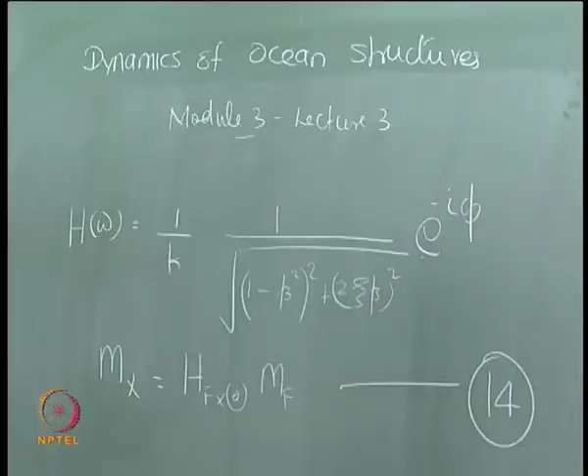In the last lecture we derived the transfer function equation, which has a response ratio beta, the ratio of omega by omega n, and zeta, the ratio of critical damping in percentage.

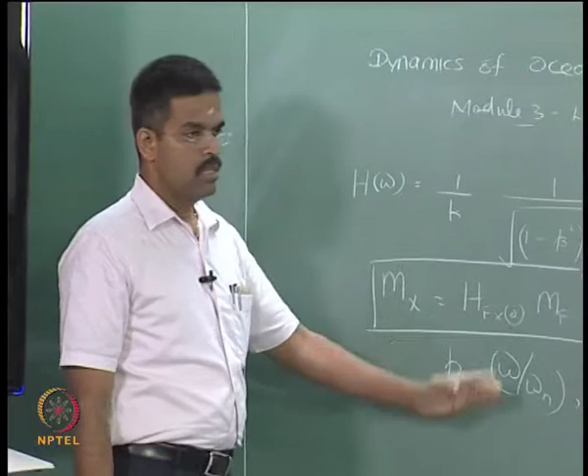Based on this, we derived a simple relationship between the variance of the response and the variance of the force, but here we are showing the corresponding connectivity between the mean value of the response and the mean value of the force.

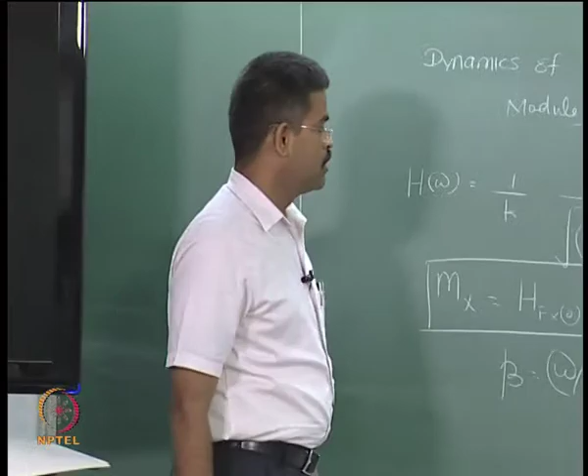We already know in a stochastic process we are talking about realization of the force and the x value. So F1, F2, F3 etc., or realization of f of x, are the set of ensembles of f of x, whereas x1, x2, xn are realizations of the response. Connecting these two is my transfer function.

We also see from equation 14 that if the force function is a zero mean process, then the response will also remain a zero mean process.

So let us quickly get the details of the response spectrum and see how it looks like.

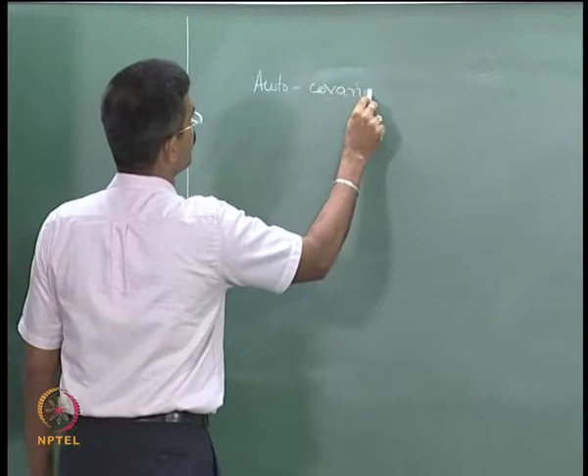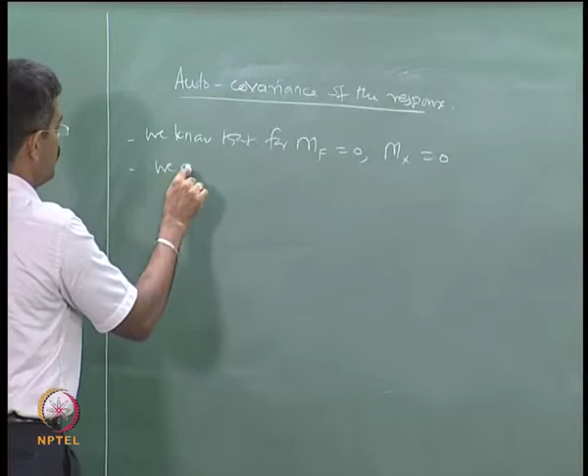Now let us look at the autocovariance of the response. We already know that for m of f equal to 0, mx also remains 0, and we agree that f of t, especially in offshore structures, is a stationary process.

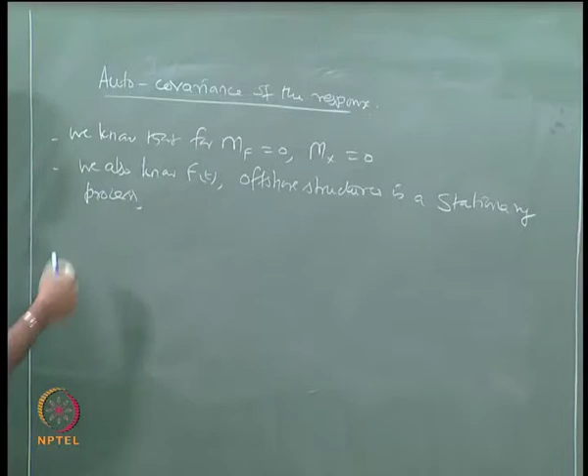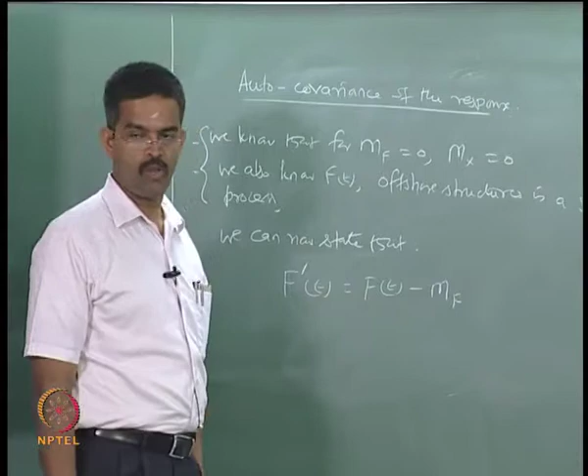Based on this we can now write a new function, f dash of t, which can simply be said as f of t minus m of f. I can always deduct the mean value. Fortunately in my problem, since it remains stationary, this may tend to 0 for a zero mean process. So it is as same as this.

In that situation, if x dash of t be the response of the load process f dash of t, then I can write x dash of t as the integral from minus infinity to plus infinity of h of x of s, f dash of t minus s, ds. This is the standard form for writing the expression for the response.

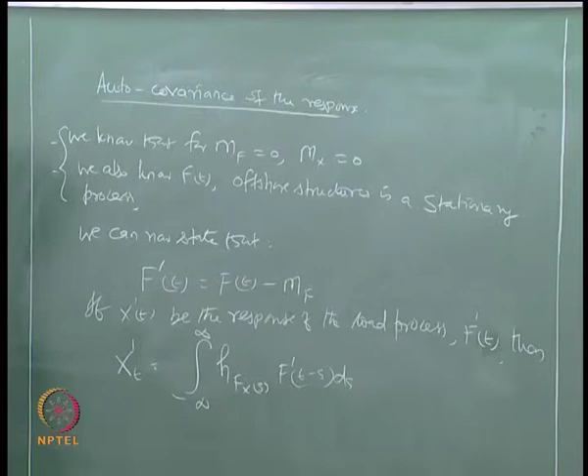Now substituting f dash of t as f of t minus m of f, I can write this equation as 0 to infinity, because the realization at the negative value becomes invalid for us, of h of s, f of t minus s, ds, minus 0 to infinity h of fxs of mf ds.

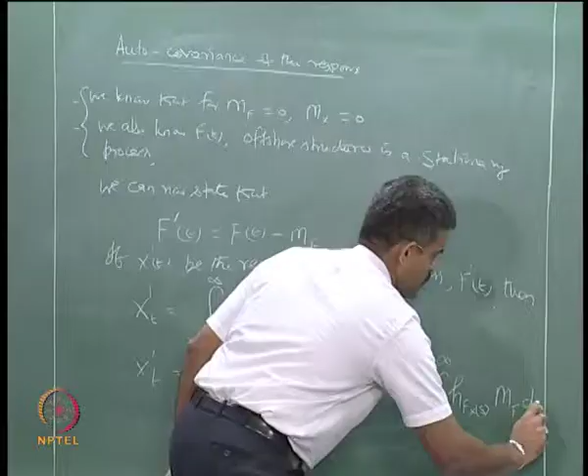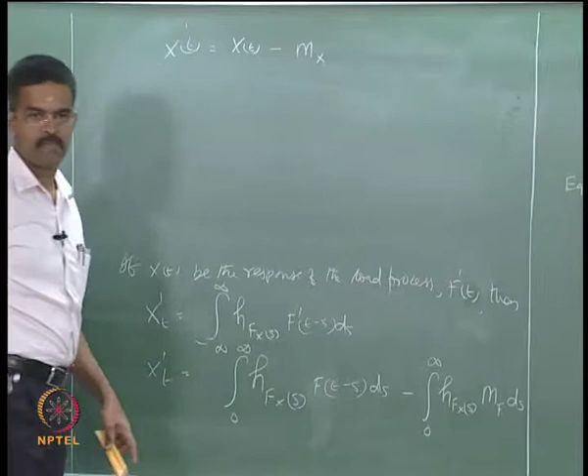This is nothing but x dash of t, is x of t minus, this can be said as the mean value of x, which I call equation number 15.

Now, for x dash of t to be a zero mean process, f of t and f dash of t will have the same autocovariance.

Using this statement, the autocovariance can be given as xj of t, xj of t plus tau, expressed as 0 to infinity h of s1 of fj t minus s1 ds1, which is one part corresponding to xj, multiplied by 0 to infinity h of x s2, fj of t plus tau minus s2, because I am looking for a time shift, ds2.

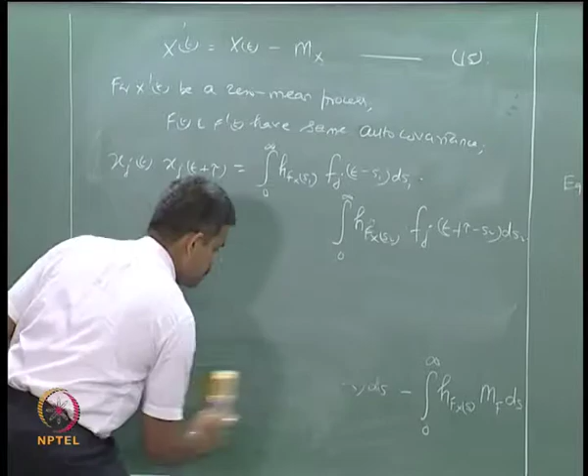I can rewrite this equation slightly by rearranging the terms. Now this becomes the integral of h of x s1, h of x s2, fj of t minus s1, fj of t plus tau minus s2, of ds1 ds2, which I call equation number 16.

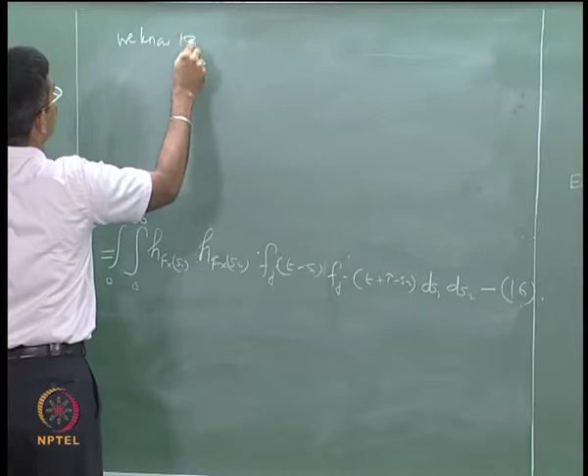So fx s1 s2 fj. Now, we already know the expected value of x at t plus tau can be expressed simply as the limit as n tends to infinity of 1 by n, summation j to n, xj, n, x t plus tau. This is a standard expression for finding the expected value at a difference of tau.

I am using the same methodology for expressing equation 16 now. I should say the double integral from 0 to infinity of h f x s1, h f x s2, times the limit n tends to infinity of 1 by n, summation j to n, of fj t minus s1, fj t plus tau minus s2, ds1 ds2.

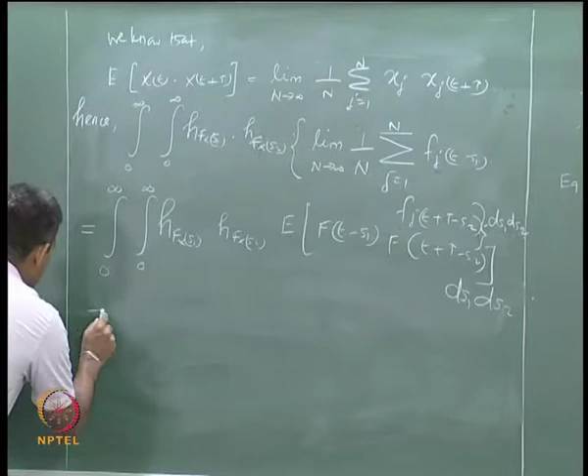Now I slightly re-alter this equation, saying 0 to infinity h of x s1, h of x s2, replacing this by the covariance of the force with tau plus s1 minus s2, ds1 ds2. I can write this because f of t is stationary, and since f of t is a stationary process, the expected value of x of t plus tau will be independent of time.

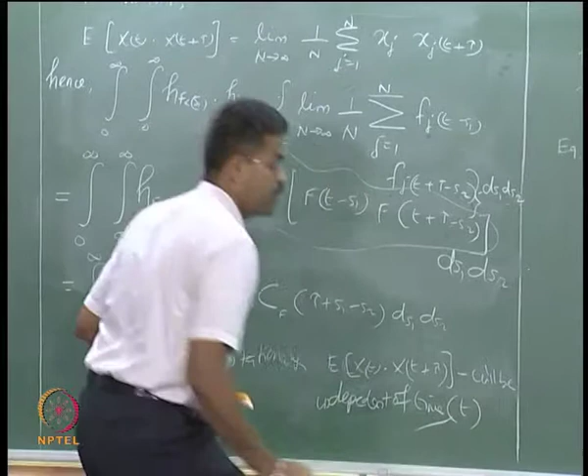To be very specific, independent of t, not tau—tau will be there. Therefore, now I can write the autocorrelation function. Any questions here? So I will rub this part, take away this. Now I can write the autocorrelation function for this condition.

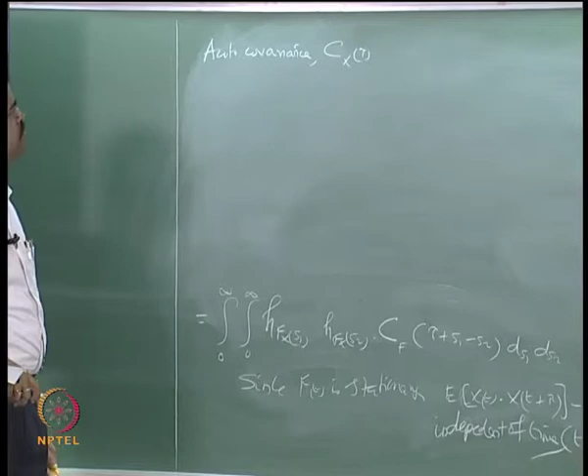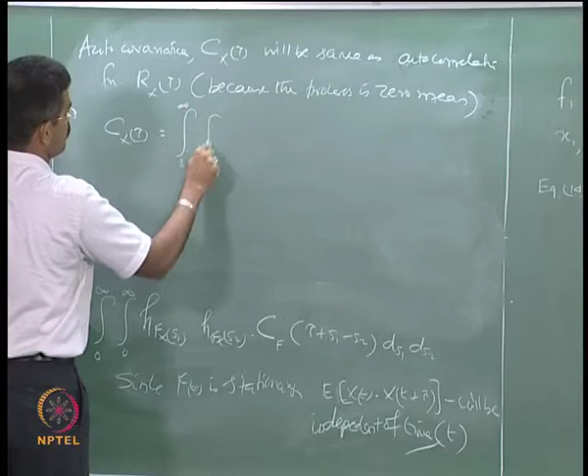The autocovariance of the response, which I call Cx of tau, will be the same as the autocorrelation function R, we call this Rx of tau, because the process mean is zero. So I can now write Cx of tau equals integral 0 to infinity, 0 to infinity, hfx s1, hfx s2, Cf of tau plus s1 minus s2, ds1 ds2. I call this equation number 17.

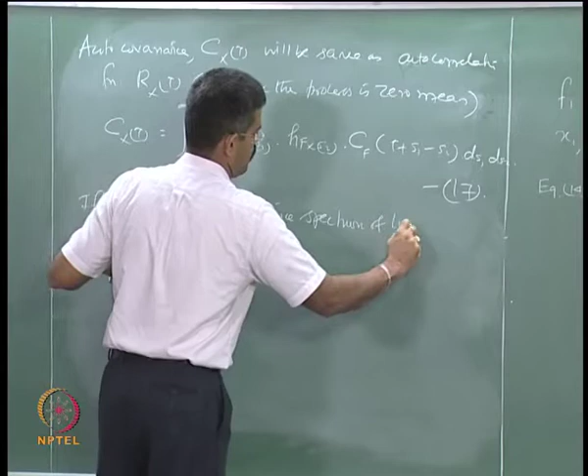Now we already know that the response spectrum connects the force variance and response. Let Sf omega be the variance spectrum of the forcing function F of t, and Sx omega be the variance spectrum of the response x of t. Then the variance of x of t is given by the Fourier transform of Cx of tau.

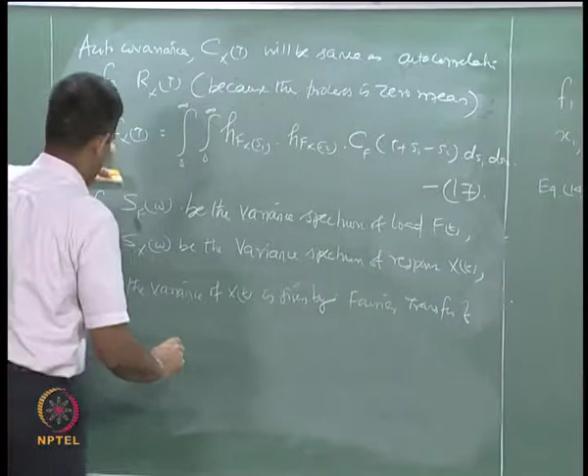You can do a Fourier transform of equation 17 to get from the time domain to the frequency domain. So if I do that, I get Sxx omega, which is the variance of the response in the frequency domain, given by 1 by 2 pi times the integral from minus infinity to plus infinity of Cx of tau, e to the power minus I omega tau, d tau. That is the standard expression for FFT from the time domain to frequency domain. I call this equation number 18.

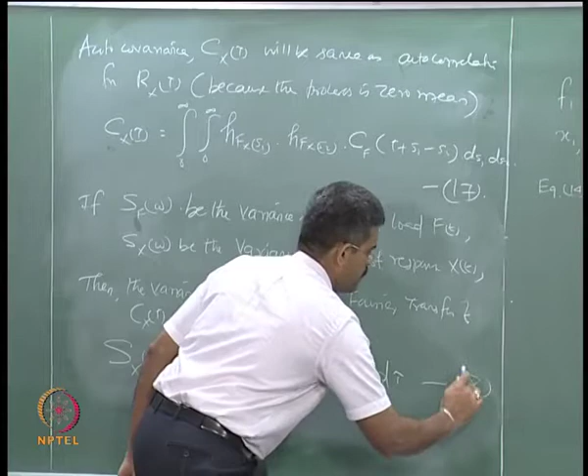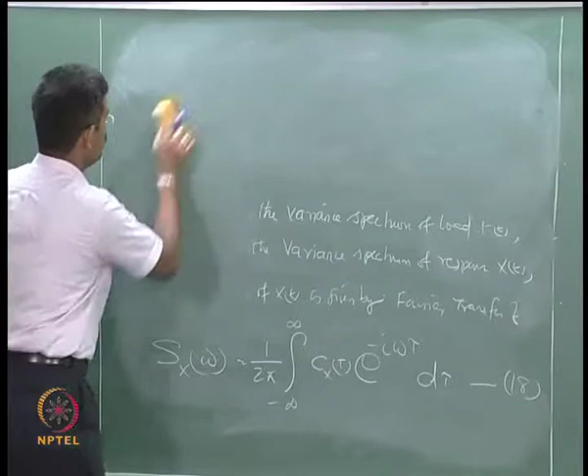Now I have the equation for Cx tau from 17, substitute in 18 and expand this to see what happens. So I should say: substituting Cx tau from 17 and expanding. I can remove equation 17 now since we already have it, and retain this equation as it is.

So substituting Cx tau from equation 17, we get: Sx of omega equals... Cx has hfx terms, I will take it out. Let us do separate integrals: this is h fx s1, h fx s2. There is an advantage of writing it like this.

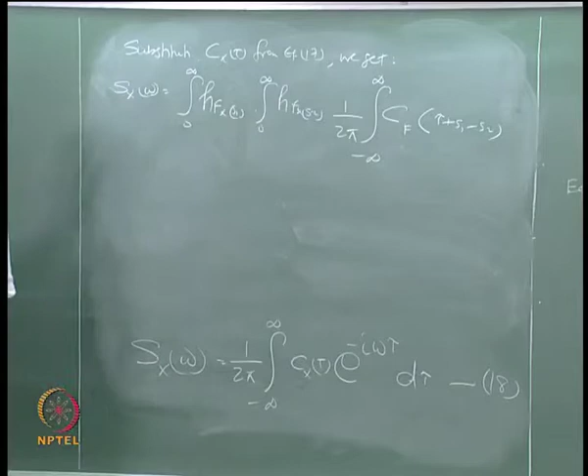Then I say 1 by 2 pi of the integral from minus to plus of Cf of tau plus s1 minus s2, e to the power minus I omega tau, d tau, then ds1 ds2. Is that okay?

Now let tau plus S1 minus S2 be theta. I substitute it here to be theta, and d theta will straight away be d tau, the differential. Hence, I will remove this.

Sx of omega can now be rewritten as the integral 0 to infinity, separately hfx s1, 0 to infinity hfx s2, 1 by 2 pi, integral minus to plus of Cf of theta, because tau plus S1 minus S2 is theta.

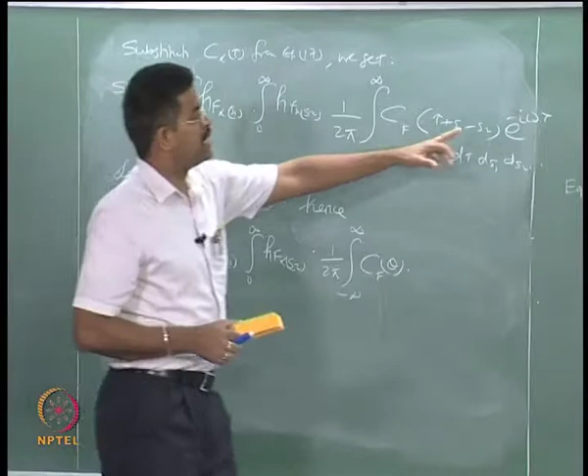Now from this expression, tau will be theta minus S1 plus S2 — I have got a minus sign here. So what I do is take S1 separately, S2 separately, and theta separately. Let us see how. So I need I omega tau; tau is theta minus S1 plus S2, I separate it. I want theta separately, so I write E to the minus I omega theta, theta is here with me, d theta, I club it here because that is my integral.

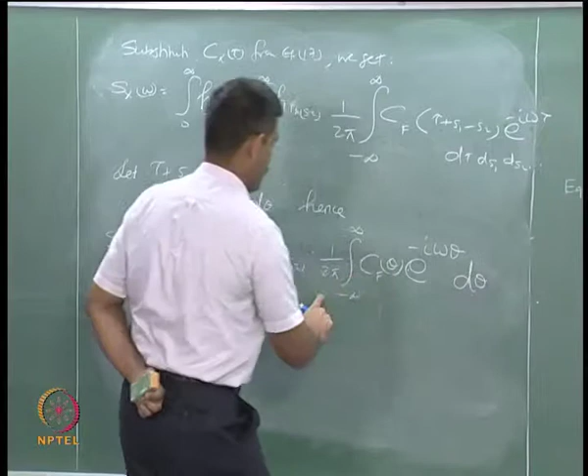Then I say E to the I omega times S1 minus S2, is that okay? There is a minus sign attached to S1 which goes away, and there is a plus sign at S2 which with this minus becomes minus — is that all right? Then ds1 ds2.

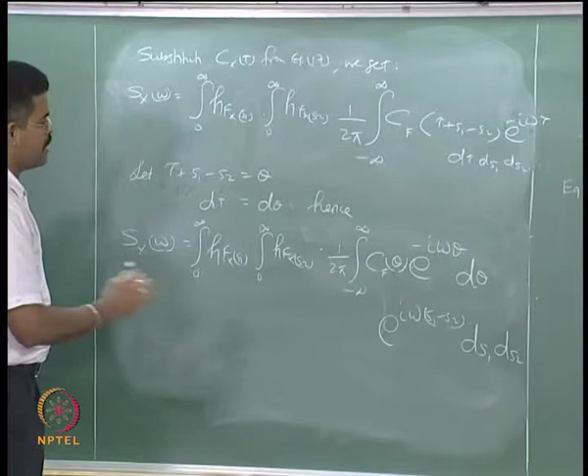So now I can rewrite this equation slightly, rearranged. It can be: integral 0 to infinity h of fx s1, E to the I omega s1, ds1, with a second term of integral 0 to infinity h of fx s2, E to the minus I omega s2, ds2.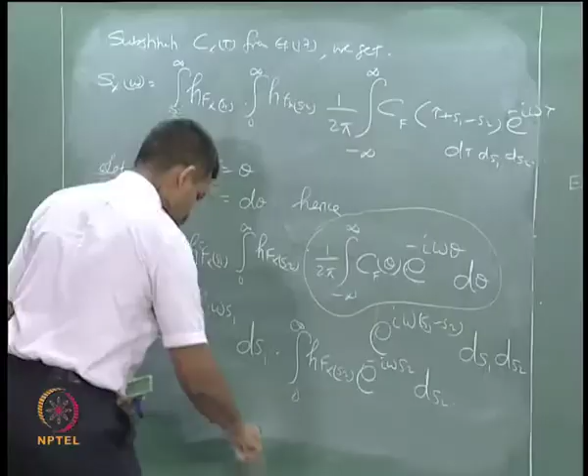And this term, 1 by 2 pi of integral... d theta, this can simply be called SF of omega since it relates to the force. Look at the equation back, it is SF of omega, right.

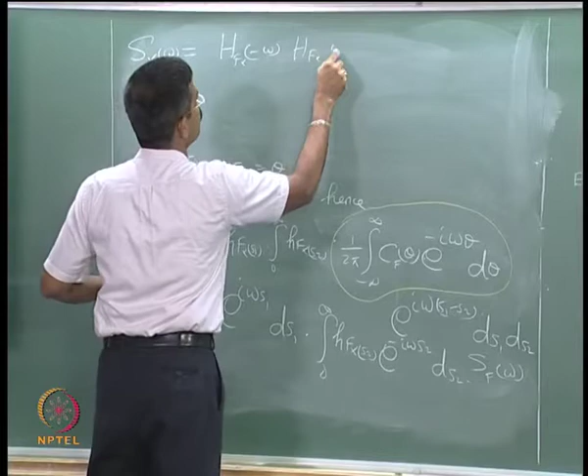Now I rewrite this last equation once again slightly differently. This can now be said as, talking about Sx omega: this is Fx, 0 to infinity, which is nothing but the impulse response function — small h is the impulse response function. So doing the integration, I get this value as h of Fx of minus omega, and the other value h of Fx of plus omega, the two values multiplied by SF of omega.

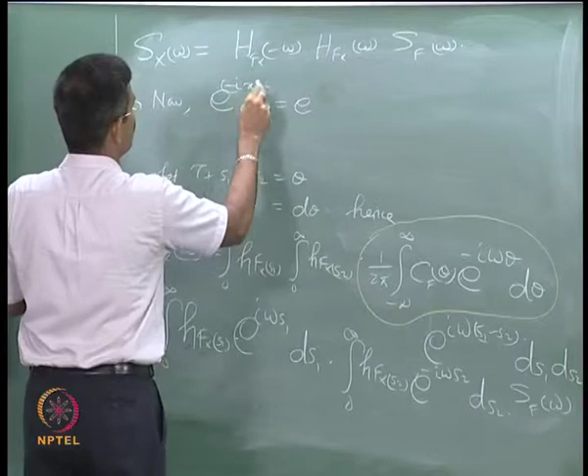Now, e to the power of minus ix star, or any multiplier, will have the same implication as e to the i omega, or e to the ix, let us say. Not talking about omega, any value of star will have ix. Then I will remove this.

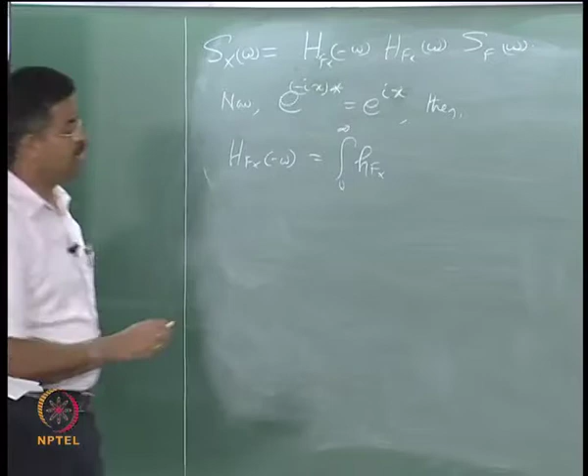h of fx of minus omega can be written as this value, which can be written as integral from 0 to infinity of h of fx of t, e to the i omega t dt, which can also be said as integral from 0 to infinity of h of fx of t, e to the power of minus i omega t star dt.

So this can be written further as integral from 0 to infinity of h of fx of t, e to the minus i omega t dt, and put a star here, which is the same as H F omega star.

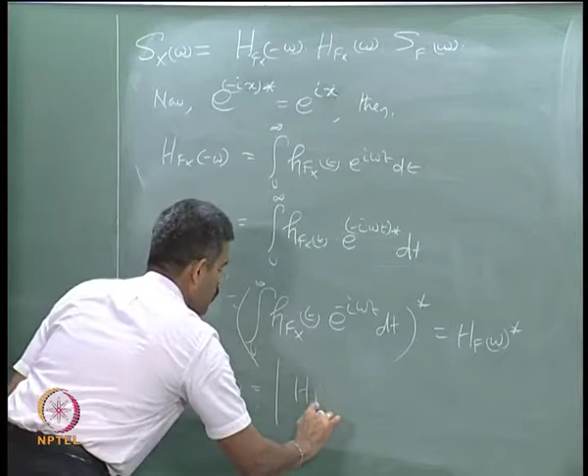Therefore, I can write Sx omega as the mod value of h omega squared times Sf omega. This is equation number 19.

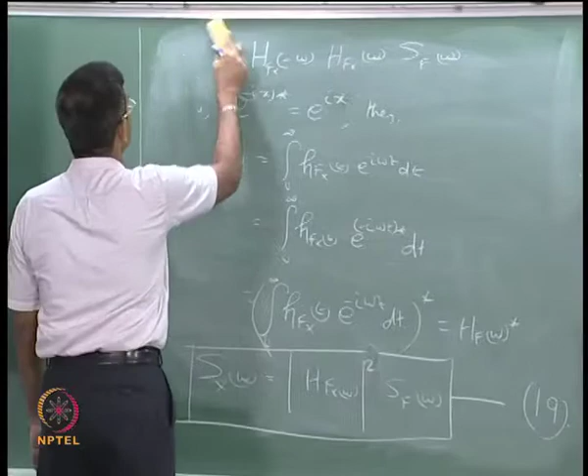This gives the relationship between the response spectrum Sx omega and the force spectrum Sf omega, or the load spectrum. So equation 19 gives the relationship between the response spectrum Sx omega and the load spectrum SF omega.

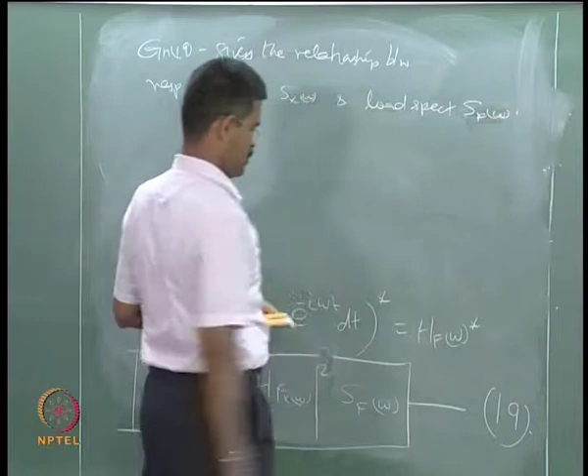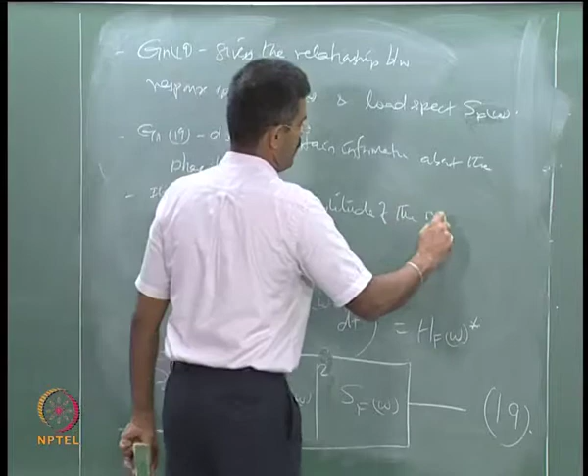But interestingly, equation 19 does not contain information about the phase lag. It gives only the amplitude of the amplification of the amplitude - amplitude amplification, we can say.

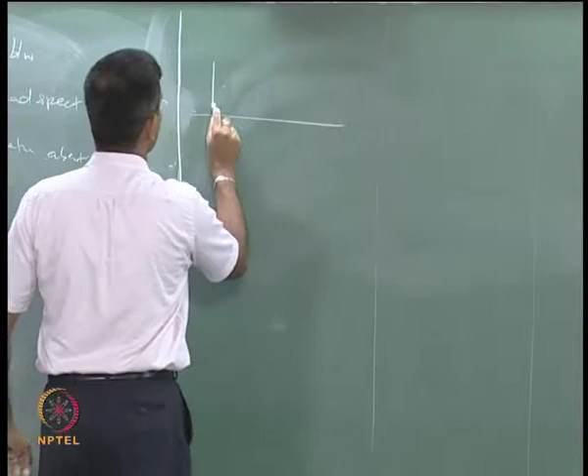Now let us see how this looks for weakly damped systems, that is very important. Let us try to plot this. Let us say I had a system subjected to some f of t - this is time, and this is the variation of amplitude of the force with respect to time. I impose this force on a mathematical model.

Having k, c and m, having x of t with some force f of t. This is my f of t, this is my x. I have to measure x of t from the mass center, which gives me a response like this.

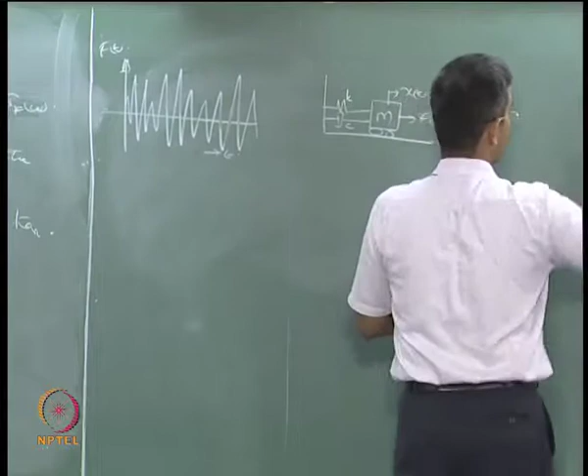If I try to plot the covariance function of this, it appears like this - this will be t, or now instead of t, because it is a stationary process, we put this as tau, and this becomes my Cf of tau, which we already had the equation for.

Correspondingly, I can also have the impulse response function, which can look like this - plotted against tau, which is hf(x) of tau.

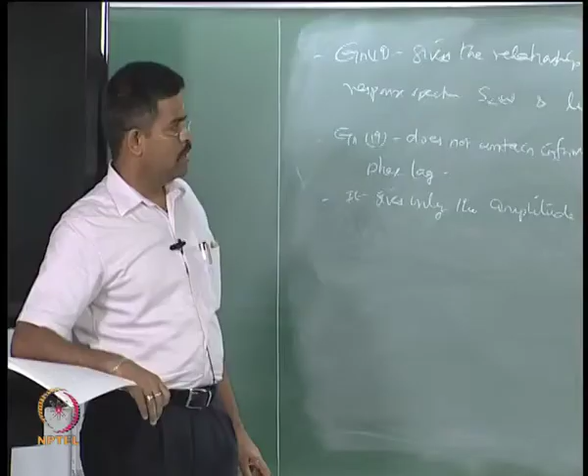On the other hand, if you look at the response function x of t, then it plots like this. This can be Cx of tau.

So if you look at the load spectrum, it looks like this - some load applied, let us say, looking only at the content. So this becomes omega, and this becomes Sf of omega, looking only at the energy content of the spectrum.

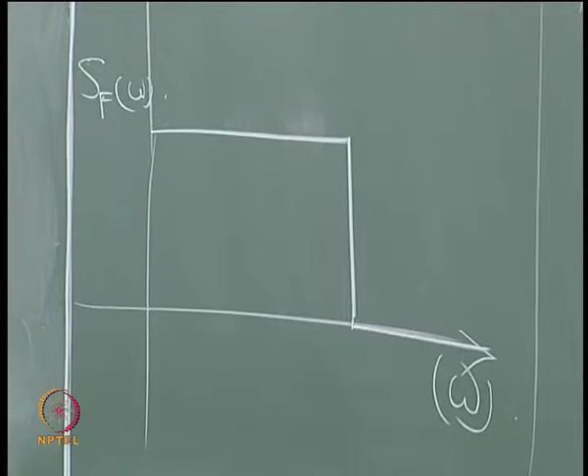And the transfer function which connects this spectrum to the response will look like this, which I call h of fx omega absolute - for different omegas, of course, basically it will come to 0. And the response spectrum, after connecting the transfer function to the load spectrum, will look like this.

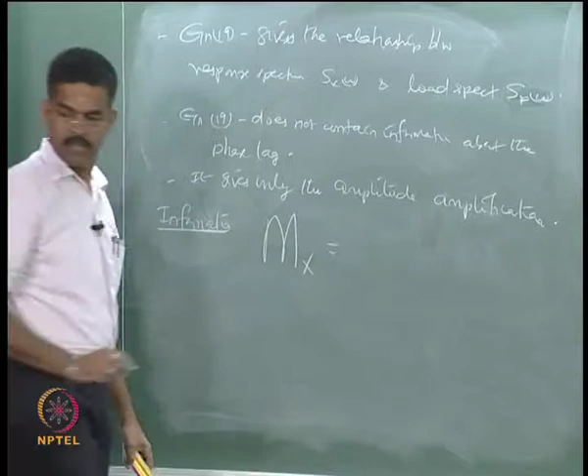So we have very important information from this, very important information. Let us see what they are. We already know that mx is given by h fx0 times mf. This is what we have already derived.

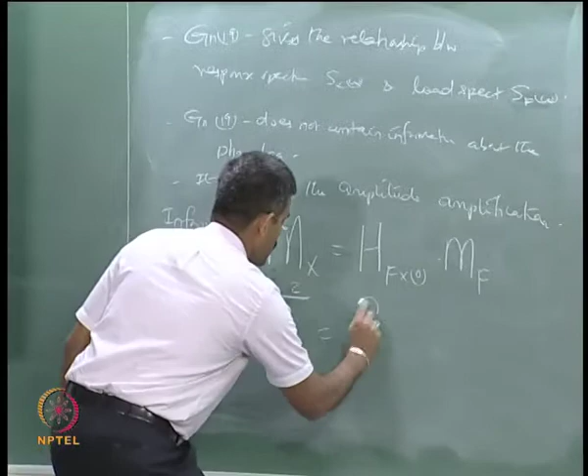Because, remember, in stochastic dynamic analysis, unlike deterministic analysis in the time domain, we do not look for exact values of x of t - we look for the first order and second order moments of the statistical responses, realization of these values. So the first order is the mean value, which can be obtained from the transfer function. We just saw the expression for the response spectrum, which is also said to be the variance of the response. So the variance of the response, that is the standard symbol, is nothing but the integral from minus infinity to plus infinity of the absolute value of h fx omega squared, times the load spectrum Sf omega, d omega.

So the square root of the variance will give me the standard deviation which we wanted for my analysis. The right hand side of this equation, I can call both these equations as equation number 20.

So the right hand side of equation 20b - this is a and this is b - is evaluated numerically.

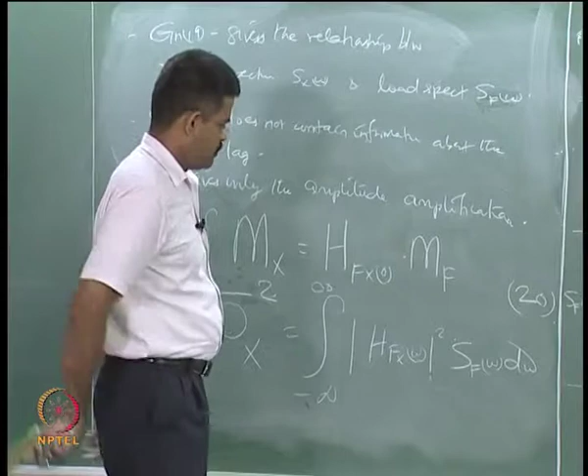Now the question comes: if zeta is very low - you remember this function has the zeta component in it - if zeta is very low, what will happen to my response? Let us see that.

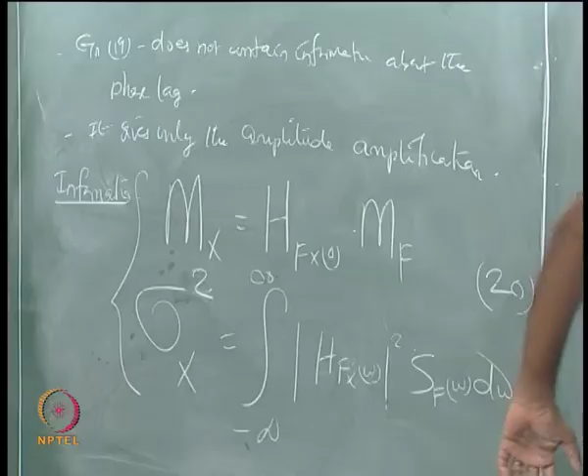Let us try to plot and write important inferences from equation 20b, and understand the quality of the response spectrum or the transfer function at very low zeta values, because we have zeta values only close to around 2% or maximum 5%. So for zeta much less than 1, let us see how this looks.

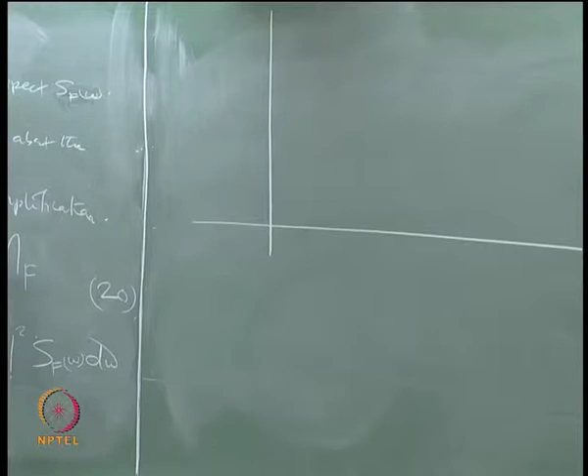The spectrum looks like this. We will try to plot the amplitude amplification given by h omega, plotted here, and here we plot beta, which is nothing but omega by omega n, and beta equals 1 at resonance.

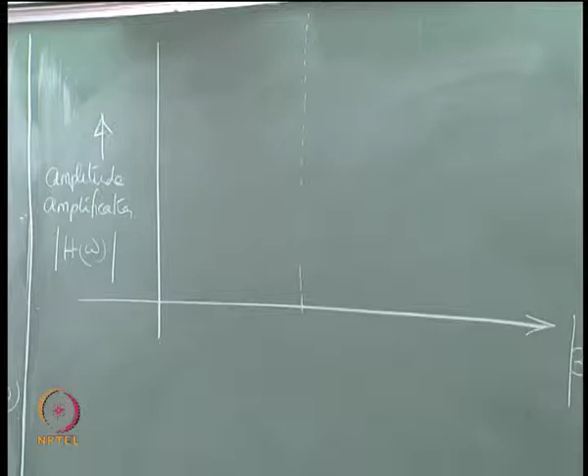And these values are all written as, let us say, starting from 0.1 by k - there is a denominator k in my h of omega - so 1 by k, maybe 10 by k, 20 by k, 100 by k. So 10 by k, let us say 100 by k - these are the values which I am trying to plot.

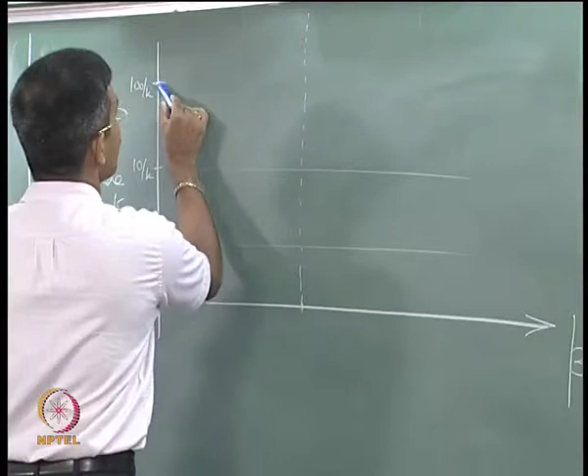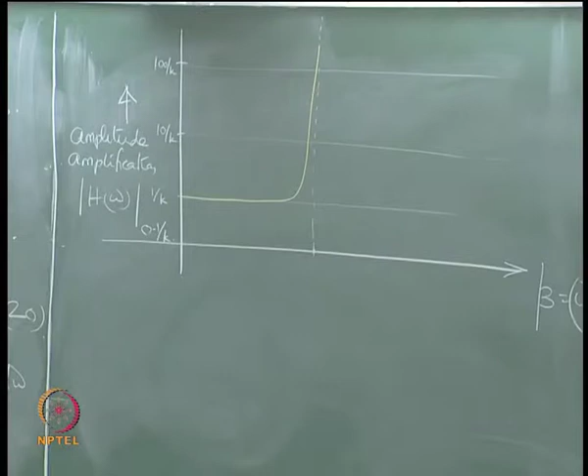For different zetas, all curves will start at 1 by k, and it goes very steep, and then comes down to 0.

If you have zeta 0.01, very low value, I will write zeta value not a percent. For any increased value of zeta, the curve will have this shape. This is for zeta of 0.1, this is for zeta of 1, this for zeta of 0.5 and 1.

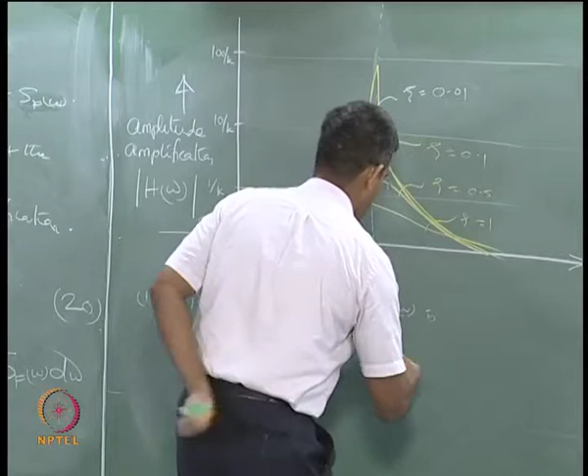So we can write an interesting information from this curve saying for very low value of zeta, h omega is closely amplified near omega resonance as a narrow band.

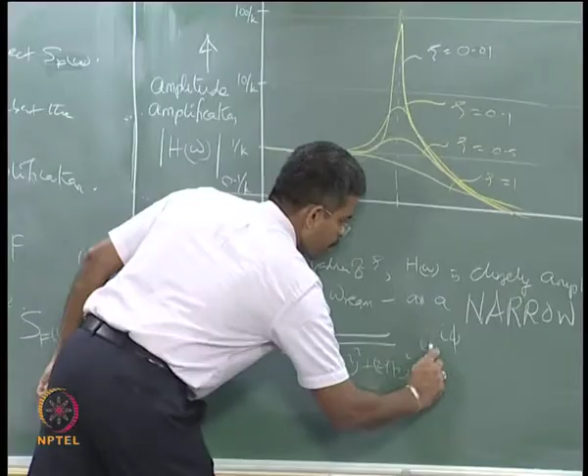Of course, for our clarity, h omega is given by 1 by k of root of 1 minus beta square squared, 2 zeta beta squared, E to the power minus i phi, is it not? Minus i phi in this equation or in this plot. So the band is very close, this is the band which we call as narrow band.

Now, interestingly, in literature people call this aspect as white noise approximation. Let us see what is that white noise approximation.

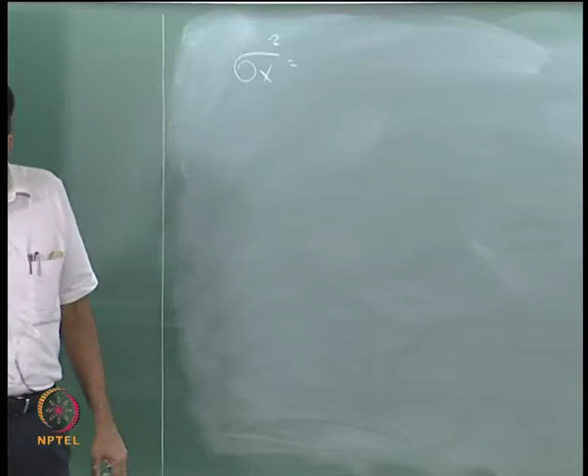I will remove this. Now, we already know that sigma x square is given by minus infinity to plus infinity of hf x omega square, sf omega, d omega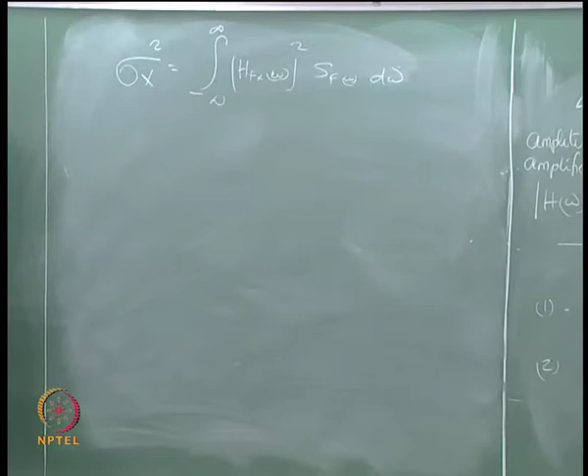for sf omega, that is the variance in the load, for sf omega varying slower than h of fx omega square, because you can see the variation is drastic here, okay.

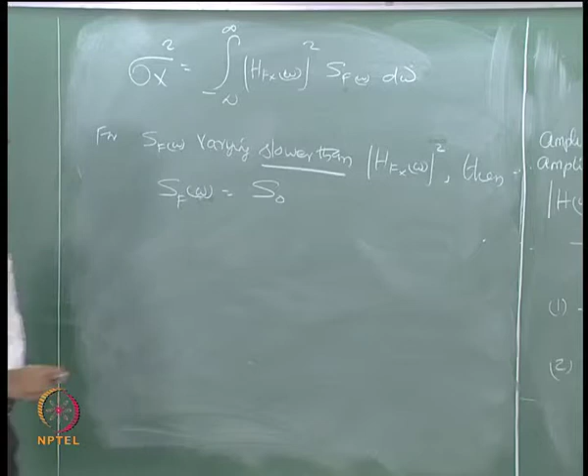Then there is an approximation made in the literature saying that sf omega can be replaced by a constant called S naught, where S naught is a constant. Therefore, sigma x square can be written as S naught into minus infinity to plus infinity integral of the transfer function square d omega, and this is what we call as white noise approximation.

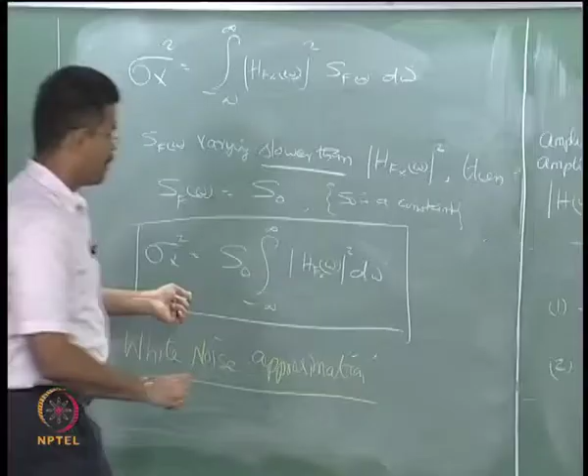What does it mean? The input spectrum is replaced by a constant, okay, that is called white noise approximation.

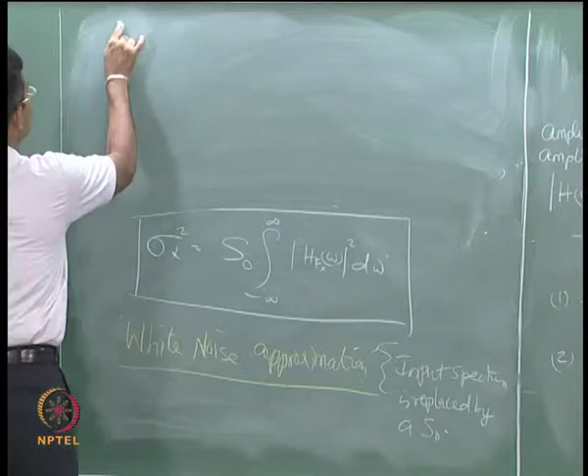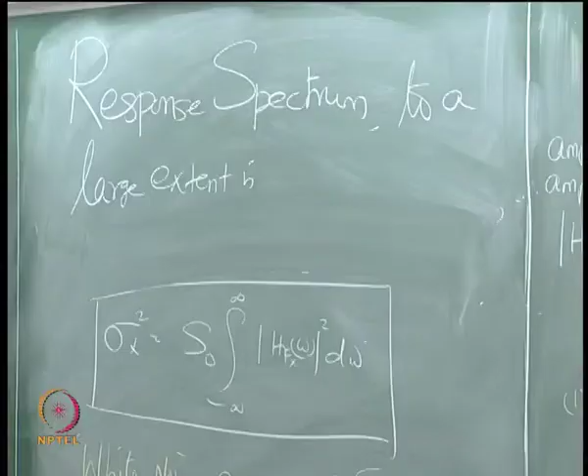So we have a final inference from this statement saying the response spectrum, to a large extent, is determined by the square of the transfer function. So some people write the equation as response spectrum is equal to square of transfer function multiplied by the load spectrum, or a constant. So we have seen two important inferences.

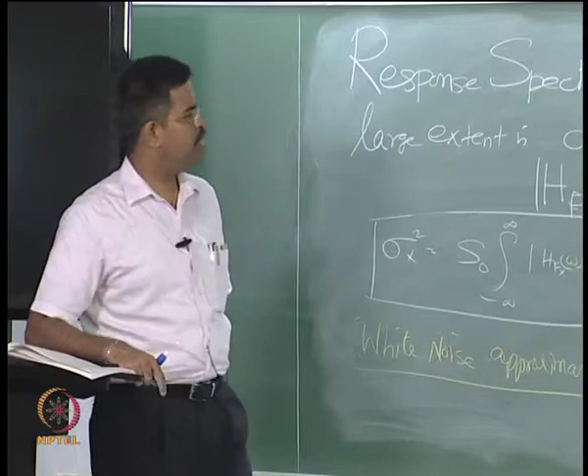For the input load process remaining stationary, it amounts to a zero mean process where the transfer function becomes time independent. For a weakly damped system, the amplitude amplification is focused only near the resonance region.

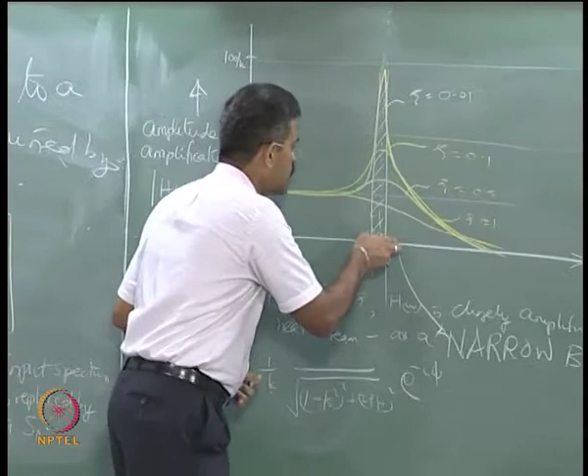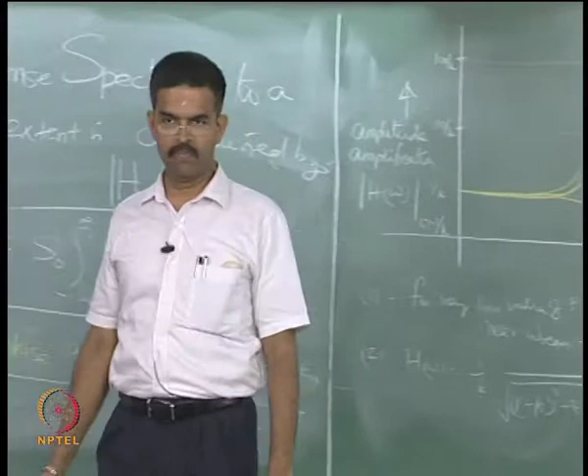What does it mean? If you really wanted to control the response of any system of this order, you have got to only play not on a broadband system, only in a narrowband system. That is why generally in every case of response control algorithms, people tune the secondary frequency with the fundamental frequency of the system. One may ask why the response need not be controlled and tuned for the entire band of omega - it is not required actually. That is the reason why people do it.

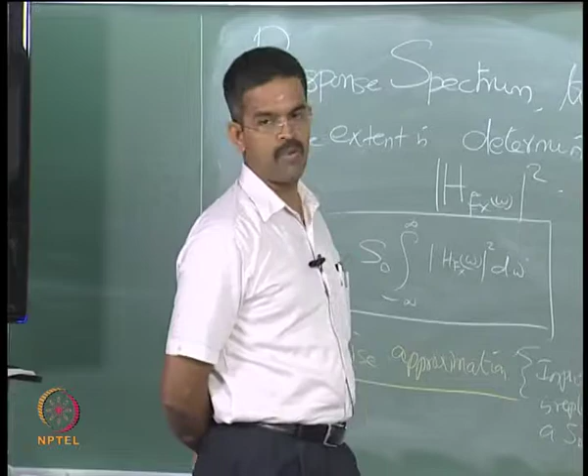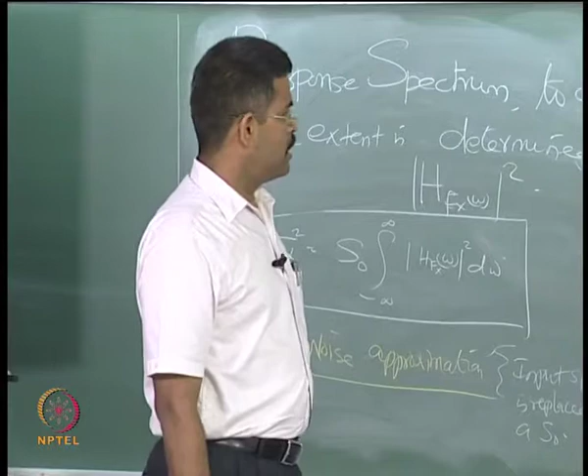In fact, we have also seen one example which we solved on a TLP as well as on a tuned mass damper system on articulate tower, where we had tuned the secondary mass system omega with that of the fundamental frequency only. Of course, the benefit was looking like this: at practically omega equals omega n, it does not become 0, it is marginally 0, whereas you get two subsequent peaks. That is what we already seen in one of the case studies in the last module on multi-leg articulate towers using tuned mass dampers.

So this is the reason why for weakly damped systems people focus only on narrow bands, and the response spectrum in such cases is highly dependent on the transfer function.

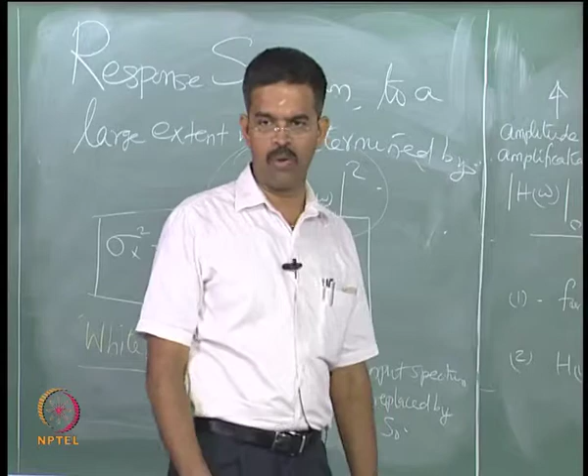So in the next class we will talk about some important item called return period. What do you mean by return period? Because in stochastic dynamics, return period, or what period you must take for the load process, is very important. We will talk about that, and we will also talk about modal response analysis - how many modes should I use, where should I truncate my mode, why and how. That will end the discussion on stochastic dynamics part.

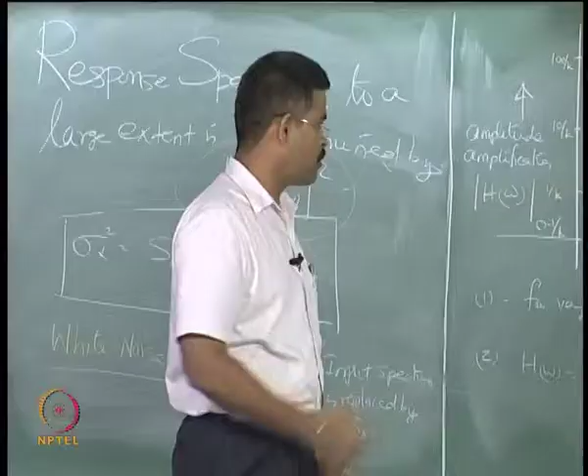We will of course solve a couple of problems, hand-written problems, simple problems on modal analysis or modal participation factor. We will evaluate and see, because there have been questions from students asking how many frequencies or how many modes should I consider in a multi-degree freedom system model. We will address that in the coming lectures. Okay, so any questions?

So the fundamental deviation of stochastic dynamics compared to the conventional deterministic analysis is that here we are not talking about the absolute values of the responses, we are talking in terms of its first and second order moments, mean and standard deviation, and of course variance and skewness also. So based on this one can design the system further. That is the deviation from the conventional analysis what we did in the second module. Any questions? Okay.